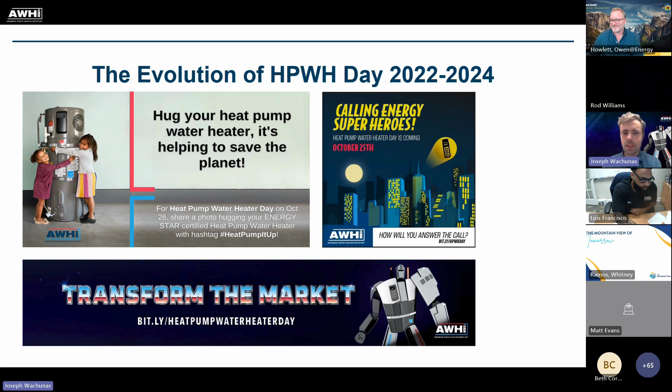Just a quick evolution, this was our third year doing Heat Pump Water Heater Day. First we were talking about hugging your heat pump water heater, then we talked about your superheroes, and this last year the theme was transforming the market. So thanks to all of you for posting and using this market transformers theme. We felt it was quite successful. Hopefully you saw the trading cards based on the different legs of market transformation: the policy, the product, programs, promotions, and payments that we had a good little fun with this technology in October.

We did our promotional toolkits, a lot of use, everything went pretty well. I can't get rid of my background, still have it up. I don't know if I'm ever going to take it down.

Just wanted to celebrate our Excellence in Water Heating Awards winners again. We had Albert Brooks for the Commercial Heat Pump Water Heater Award. We had a tie for the Residential Heat Pump Water Heater Market Transformer, the Tech Program, and Cooper Marcus from Quit Carbon. Of course our star Heat Pump Water Heater installers on the call, Steve Broughton from Great Northwest. But Luis, it's a good thing you can enter the running next year. So glad to have you connected.

Clayton Homes won our new construction excellence award. Our equity program award was the Energy Coalition, and of course Geoff Wickes won the Lifetime Achievement Award. So congrats to all those winners, it was really fun to celebrate with folks.

And of course all of our sessions are online on our YouTube page, I will get a link in the chat for those. So if you missed any, I know I was heavily involved in making up this content, but it was killer content.

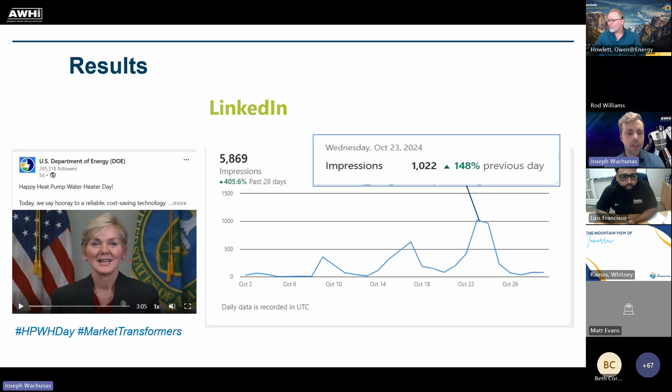We had amazing speakers, and of course had the Secretary of Energy with the keynote. So we saw some great numbers, had close to 900 registrants, close to 600 participants, good growth all around, and our website views just really spiked. So hopefully moving the needle with our impressions and participation, and the goal is to really shine a spotlight on the technology.

And just thanks to all the organizations that posted. There were over 150 organizations posting some incredible artwork there. We just did a little collage. So thank you all for posting and being part of this, and really amplifying the message of efficient water heating.

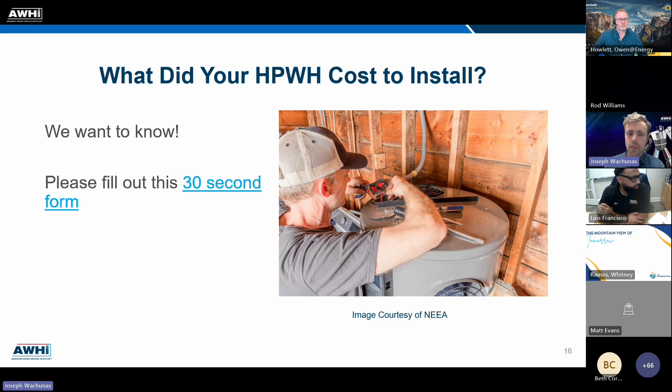So the last couple announcements: we are doing a little crowdsourced heat pump water heater installation cost survey, and we've done an article, a blog post you may have seen. You can click on this link, it's live, a 30-second form, just interested in what you paid to have your heat pump water heater installed. We're just curious how it varies across the nation, and we'll want to track this over time. So please let us know what your heat pump water heater installation cost.

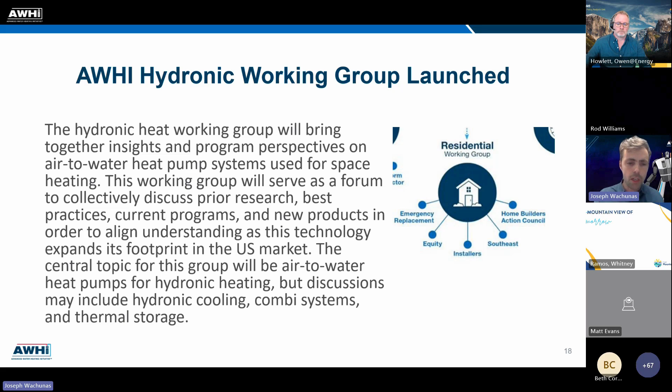No problem, Joe. Continuing on the theme of webinars, Energy Star just completed a two-part series to promote their newly released market acceleration guide. You've heard me talk about this before - it's an interactive, dynamic document out on the Energy Star website, broken up into modular sections, so there's a little bit of something there for everyone. It started out addressing the audiences of utilities and their program implementers, but it's expanded into so much more, and it's dynamic, so we will continue to update it with information.

We had in each webinar somewhere between 100 and 200 attendees join us, so not quite the 600 plus that Heat Pump Water Heater Day received, but certainly still great audience numbers. The first session was on program design and delivery, and we had Mass Save and Efficiency Maine join us for that one. The second one was more about engaging the supply chain, enhancing relationships, building demand, so we had New York State, the utilities represented there, as well as General Pacific and the team there, Crystal, who was terrific, and we had some great interaction with the audience.

Recordings will be available very soon, so we'll get those posted and sent out, Joe, so everybody can listen. We anticipate we'll be doing more of these because it just seems like the format is very engaging. It's easy, for the most part - there's always the devil in the details with logistics to get them set up, as we all know, but it really worked out well.

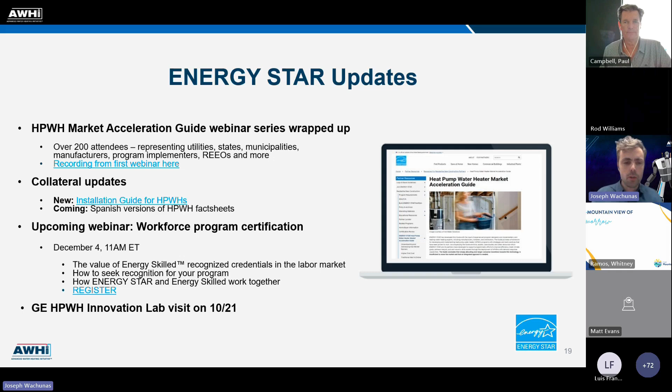Awesome. Well, stay on with me, Paul. Let's dive into our first part of today's program. We're going to talk to two heat pump water heater trailblazers who are going to share their thoughts and advice and feedback to the large industry represented here before they ride off into the sunset to some great adventures.

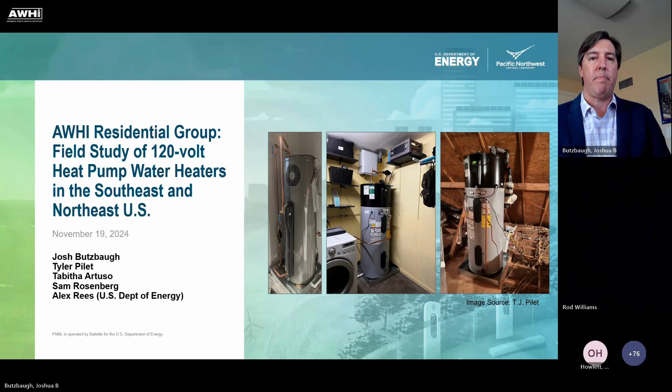Today I'm going to discuss the field study of 120-volt heat pump water heaters in the Southeast, and now we are expanding into the Northeast. Want to tip the hat also to my teammates, Tyler Pilet, Tabitha Artuso, Sam Rosenberg, and Alex Rees of the U.S. Department of Energy. I'll quickly go through some background and then the study setup, installation retrofits, which I think everyone will be interested in, analysis, initial conclusions, and then next steps for the study.

All right, the US has 65 million homes that currently use fossil fuel water heaters. They will need to convert to electric water heaters as we decarbonize. And that means switching to heat pump water heaters in particular. And for 240-volt heat pump water heaters, you have the issue of limited panel capacity and wiring. And that just means that you need two trades sometimes at the home to conduct the installation, and that increases cost and time.

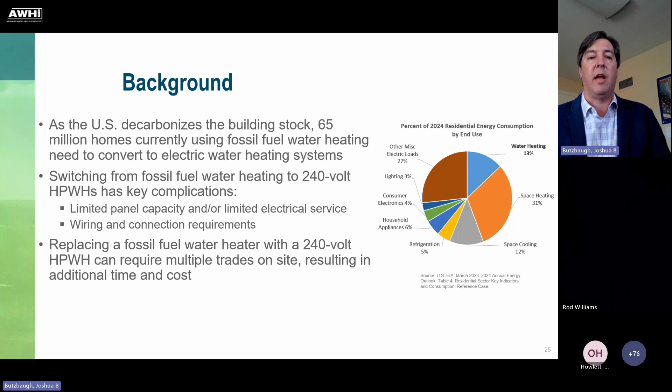The California Retrofit Ready 120-volt heat pump water heater spec introduced this 120-volt heat pump water heater that goes on a 15-amp circuit, takes up about 7.5 amps of that 15-amp circuit, and shared among other end uses. The nice part about this product is that it offers quicker and cheaper installation when electrifying homes, going from gas or fossil fuel water heaters to heat pump water heaters.

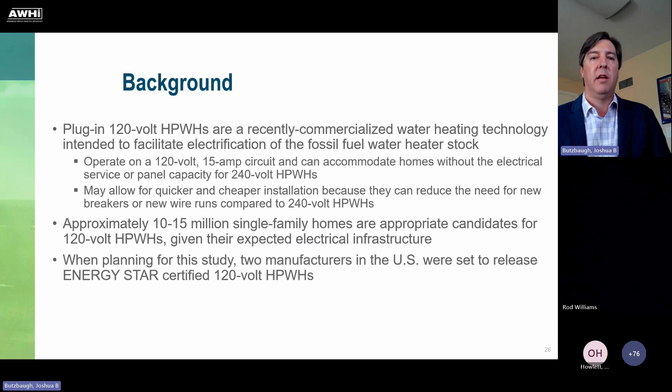There are roughly 10 to 15 million single-family homes that are good candidates for this technology. This is given their expected electrical infrastructure. And when we were initially planning for this study, there were two manufacturers that were releasing 120-volt heat pump water heaters.

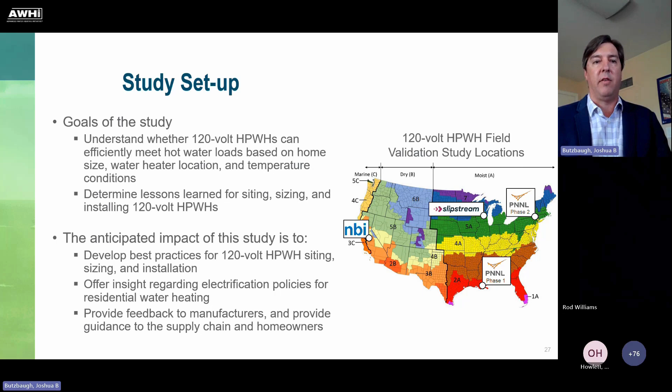The goals of this study are to understand whether 120-volt heat pump water heaters can meet hot water loads based on the home size, water heater location, temperature conditions, and then determine lessons learned for siting, sizing, and using those lessons learned to develop best practices, offer electrification policy insight, and then provide feedback back to the manufacturers and supply chain.

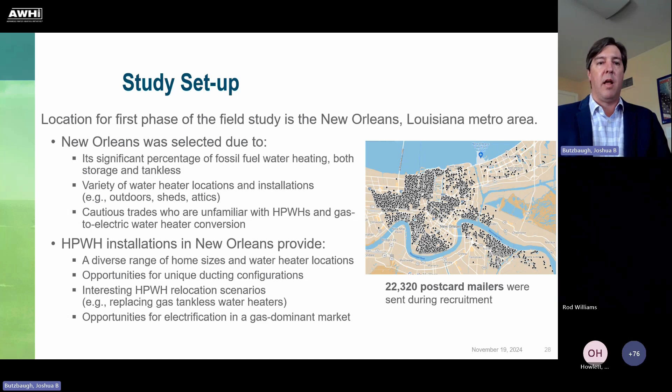For the first phase, New Orleans was selected as the location. New Orleans has a lot of different types of homes that offer interesting retrofit scenarios for 120-volt heat pump water heaters. A lot of unique ducting configurations and relocation scenarios. So it's a neat place to work if you're replacing gas water heaters with heat pump water heaters. On the right side, you see all the postcards we sent out, and we've got roughly 20 homes right now that are installed after sending out about 20,000 postcards initially. So this is like a blanket recruitment approach, so to speak.

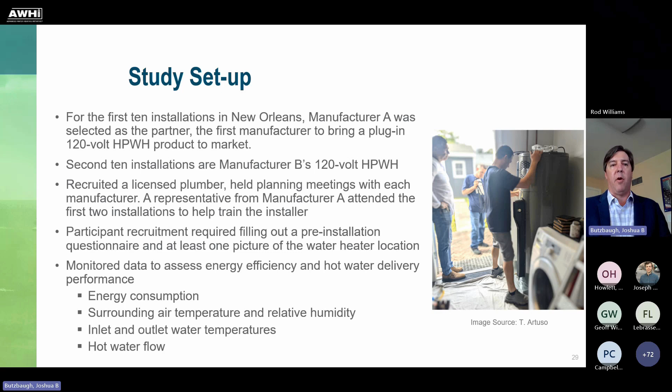For the first 10 installs, manufacturer A was selected. They were the first manufacturer to release a 120 volt heat pump water heater to market. This product is recommended in climate zones 1, 2, and 3, so that was another reason that we selected New Orleans. And then the next 10 installs were manufacturer B's 120 volt heat pump water heater, which has 900 watts of backup electric resistance. And that product is recommended throughout the entire United States.

We recruited a licensed plumber. We had to call maybe 40 or 50 plumbers in the New Orleans area. Found one that installed heat pump water heaters before, but they had so much HVAC work, they didn't want to work with us. We eventually found a smaller installer, a 2-person operation, and they were very interested to learn. We met with the manufacturer and made sure for both B and A that we sized appropriately, and manufacturer A also provided one of their staff people to conduct the first 2 installations to help train the installer.

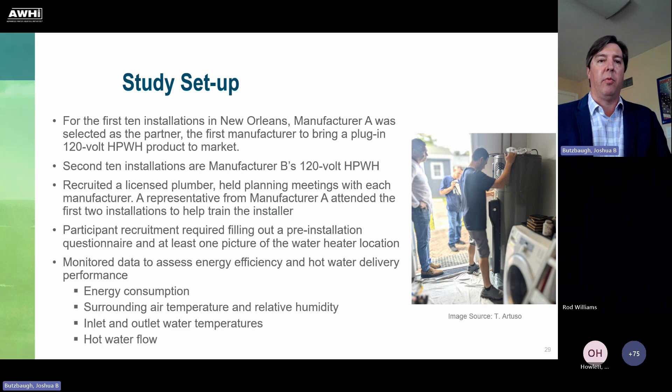Recruitment, we had a pre-installation questionnaire sent and a picture of the water heater location. This was very helpful. I recommend installers ask certain questions to try to understand the siting characteristics of the home and get a picture. Really helps with conducting the install. And we measured energy consumption, air temperature, inlet and outlet water temperatures. We've conducted some analysis with all of that data, which I'll get to in a little bit.

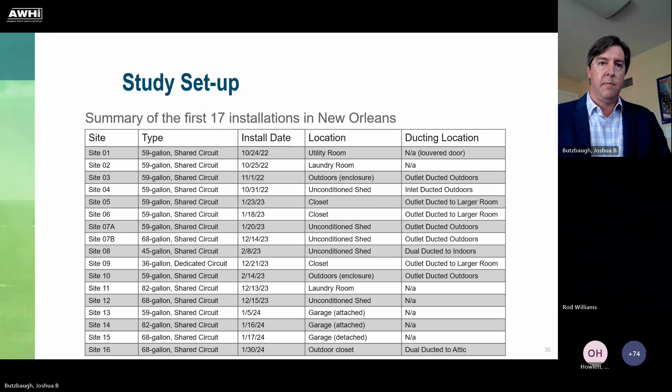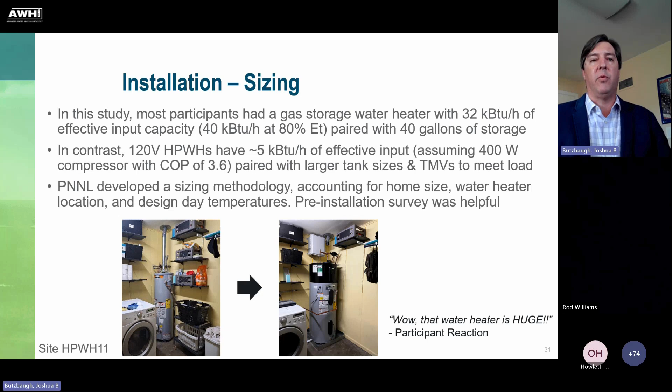So that 40-gallon gas storage water heater has a first hour rating that's comparable to a 65-gallon 120-volt heat pump water heater. And so you're going from a 60-inch tall, 20-inch diameter product to 72 inches tall and 26 inches in diameter. Plus, some of these heat pump water heaters have their air filter located on the top, so you need another 4 to 6 inches of clearance on the top. It just means that getting to the water heater location can be a challenge. We had one basement in New Orleans with a spiral style wooden staircase, and we're not going to be able to get a big heat pump water heater down that staircase if you didn't remove it. So those are the kinds of challenges that heat pump water heaters can present.

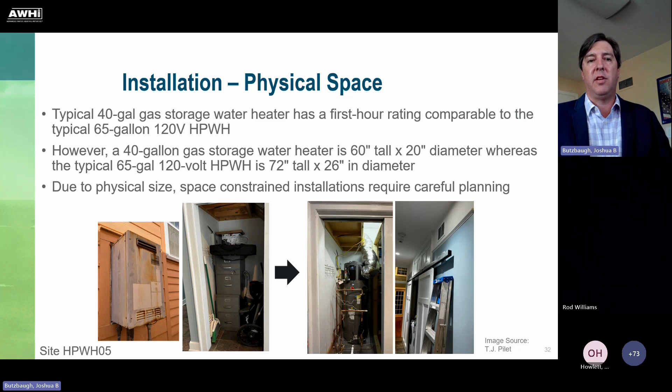And in these pictures, you'll see that there's a gas tankless water heater located outside the home. In the far left picture, this picture was taken with my colleague Tyler with his back against the wall of the neighboring home. So there's only a few feet in between these two homes. So we had to relocate to a closet. You can see that closet with the file cabinet in there. Pulled those files out, put the heat pump water heater in, ducted it, and ran the condensate through the wall. There's a washer and dryer on the other side of that wall, and then vented it up above the wall on the other side. So those are the kinds of challenges that you have with space constraints where the existing water heater may be located. If you have to relocate, it can add additional cost to the installation, but it is much less than upgrading a panel, for instance.

Another challenge were the unconditioned locations. Even in climate zone 2 in New Orleans, we've had at least two multi-day periods in which temperatures remained below the compressor cutoff temperature of 37 degrees. That would have been December of 2022 and January of 2024.

First time, in the middle picture, you can't really see it very well, but in the upper right corner, we put in a 200-watt heat lamp that kept that space warm enough to get through those 3 days and provide hot water. However, in January 2024, we tried the same tactic and it did not work. The home ended up using more hot water than the heat pump water heater could provide, and the homeowners were unhappy and wanted their gas water heater back.

So you can kind of see the transition from the old gas water heater, the heat pump water heater, back to a gas water heater because the homeowners no longer wanted that heat pump water heater. And that just means that for outdoor water heater locations, like these enclosures, which are popular in the Sun Belt, detached sheds, detached garages, unconditioned attics, they have a higher risk of compressor cutout. And I should mention quickly that in attic installations, we've seen air temperatures go above 120, which has also caused compressor lockout.

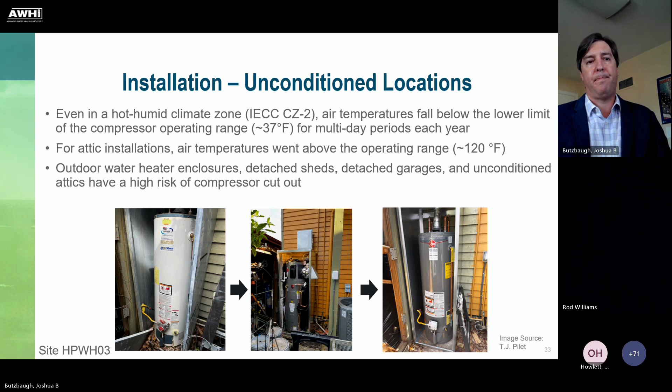The good news from this study is all of our installations were completed without changes to the home's electrical infrastructure. Did not run new wiring or outlets, did not replace or add circuits. However, we needed to conduct electrical assessments, and those took about 30 to 60 minutes. We used the circuit tracing tool, find out which circuit the outlet belongs to, and then flip off that circuit and use a meter to figure out what other end uses share that circuit. You want to make sure that there's no real large loads that share that circuit, or else it's not a great candidate for a 120-volt heat pump water heater.

Roughly a quarter of the homes we visited through site visits either did not have a receptacle nearby, even though their survey may have said they did, had a non-functional receptacle nearby the homeowner hadn't checked, they had a functional receptacle but the circuit didn't have enough amperage for the 120-volt heat pump water heater, or they had outdated wiring, like knob and tube, cloth wiring that we didn't feel comfortable putting a 120-volt heat pump water heater on. So that's one of the considerations, whether a home fits one of these four kind of profiles and whether or not a 120 volt can go into that water heater location or needs to be relocated.

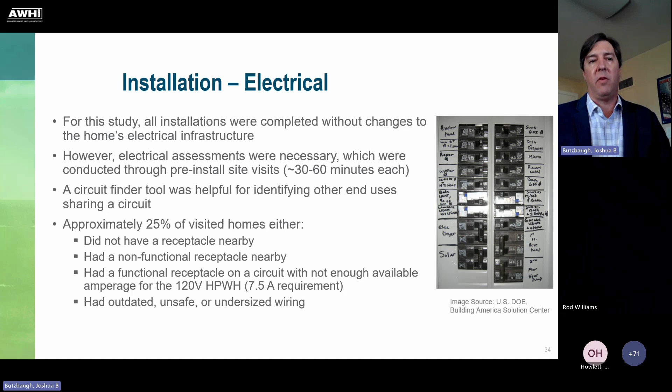As we conducted this study and did installations, we found that we needed more and more special order materials. Those water heater enclosures are made to order. They're large. The heat pump water heater doesn't fit into that old enclosure that had the gas water heater in it. We found out that flex duct and duct terminations weren't readily available at hardware stores often. We had to order duct kits, which hopefully going forward will be solved with a lot of manufacturers adding flanges again onto the heat pump water heater, so you don't need the kit.

But we also needed grills with plenty of net-free area, custom-sized louvered doors. Didn't realize this, that there are louvered doors that may not fit a number of door sizes. And then we even needed replacement thermistors in a couple of cases where thermistors failed. We had to swap them out. And that's part of the challenge of 120 volt heat pump water heaters, because you either don't have backup or don't have a lot of backup heating. If there is something that needs to be fixed or replaced, it needs to happen quickly. So having replacement thermistors is helpful.

Why does this matter? Well, if you're conducting emergency replacements, roughly in that 24 to 48-hour period, you need to have these materials available in stock for installers. And just in general, something to keep in mind is these installations require roughly 4 to 8 hours of labor. And this does not include the site visits, electrical assessments, and any return trips that we had to take.

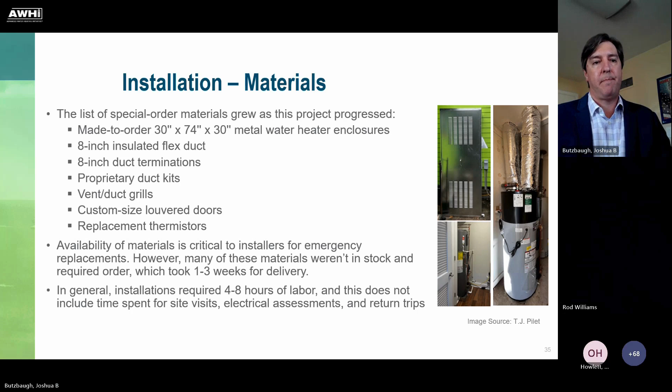Here's the hot water consumption analysis. It's not that exciting just because it fits. If you do research with hot water, it fits the profile that you kind of see normally. For two-person occupant homes, 39 gallons is very close to the low gallon per day draw profile in the DOE test procedure for the UEF test.

56 and 54 gallons are roughly in that medium use profile for the DOE test procedure. So this is to say hot water consumption was around what we would expect on average.

And then we had our high consuming days, which are the top of those whiskers, where you have roughly the 97th or 99th percentile days, which may be our peak sizing days, where you have over 100 gallons per day, and even greater than these numbers here, where the heat pump water heater needs to keep up with that load throughout the day to prevent hot water runout.

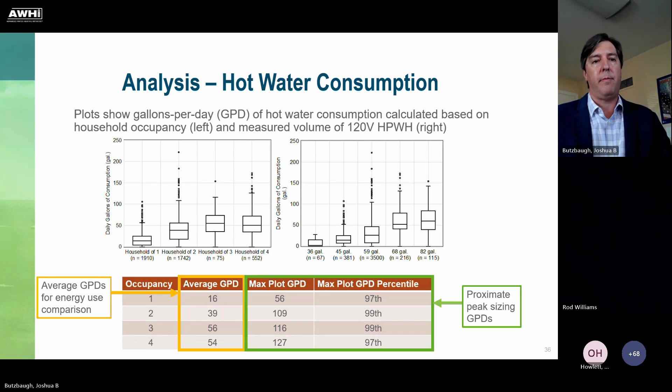Kind of a similar story with energy use. It was within what we would expect for a heat pump water heater. Obviously much, much lower than what an electric resistance water heater would do under these conditions. Average use was roughly 500 kilowatt hours for an average occupancy of 1.8 people. If you were to scale that to the US average home size of about 2.5 people, then you're looking at about 700 kilowatt hours a year.

Strong correlations between occupancy, hot water use, energy use. You'll notice that the one-person homes, such as Site 4, had a lot of days with less than 1 gallon of hot water consumption. With one-person homes, they just travel more. This particular person in Site 4, I think, was a professor who was on the road a lot doing research.

And then in New Orleans, what we found is the month of August of 2023 was so hot out that no one really used hot water in the study for that month. So you even have hot air temperatures causing reduction of hot water usage.

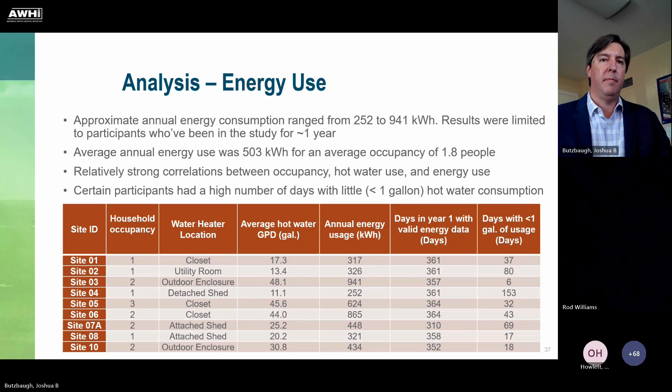For hot water delivery, out of 4,000 plus days, roughly 2% of days had hot water runouts. That's when the outlet temperature fell down to 95 degrees Fahrenheit. That's what we're calling a hot water runout.

And we're calling them days because what we'll see is someone will run out of hot water and then they're going to check again in a half hour or an hour, and they're going to expect that tank to be heated up again already. But in a lot of cases, it's not. And so we don't want to count multiple hot water runouts when it's really just one initial runout and people going back and checking their hot water again.

There were a select group of participants that had the most hot water runouts. We noticed that they had their 120-volt heat pump water heaters located in unconditioned spaces. And then of the ones located in conditioned spaces, one previously had a gas tankless water heater, so they're used to having that joy of endless hot water.

So they may not be used to having to think about how many fixtures they have going at any given time. In our pre-installation survey, 6 of the 7 participants reported never running out of hot water previously, which does not really surprise me just because of such high input capacity with gas water heating equipment.

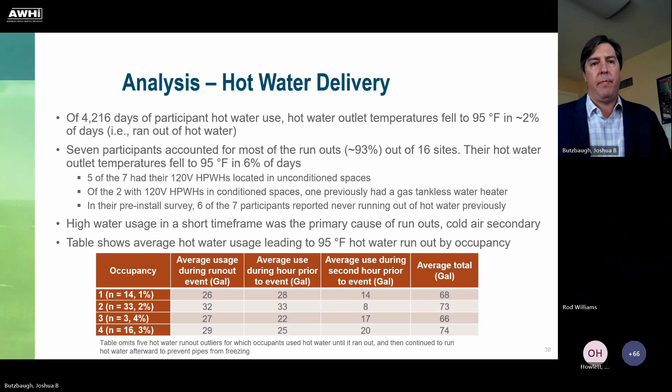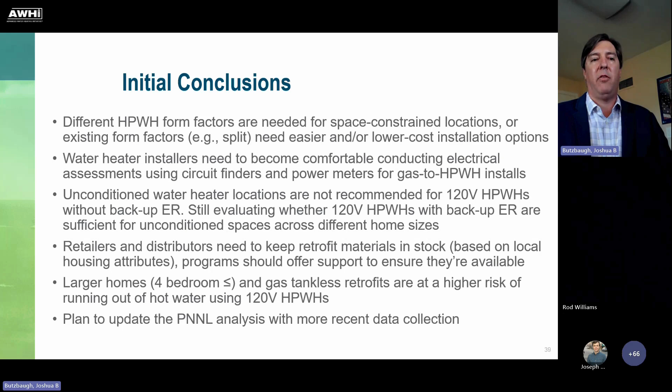And then just the larger homes and gas tankless retrofits, they have a higher risk of running out of hot water with a 120 volt product. The good news is, at least for larger homes, they generally have 200 amp panels or larger, so usually they can handle 240 volt.

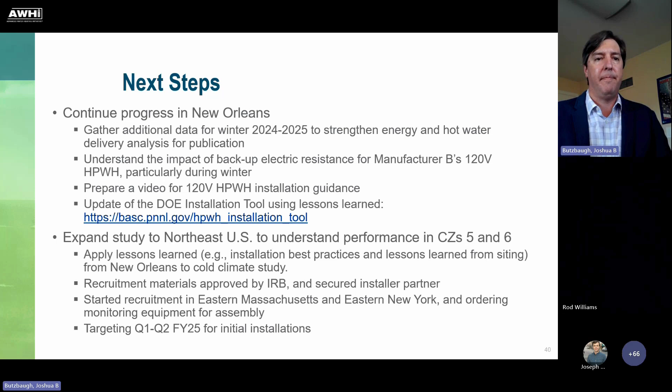That's great. Thank you, Josh. Does anybody have a burning question? I have one or two I want to ask, but anybody want to step in?

Sure, I can jump in for one. Thanks for this great presentation, Josh. Did you look at COP? Just kind of how they performed, and the other one was mixing valve set point or thermostat set point and mixing valve set points. Any information on that would be great.

Sure. So what we did is the default set point on the tanks is where we left them, and I believe they're all around 140, and that's where we've left them. It does reduce some of the COPs, and we do have some COP data. We haven't published that. I think there's a question as to how people would like to see it, whether certain temperature bands or certain seasonal bands. So we've thought about how we want to break this out that's most useful to programs. If people want to see COP data, happy to share it. Just let us know what you think is the right way to cut the data, so you get the most helpful information out of it.

Owen, I know you have a question, so please feel free. Yeah, I just wanted to ask one thing. So you said some of the heaters were not able to keep up in the cold, and some of them had resistance backup. I know that because they're 120 volt, they have small resistance backup elements. Was it only the water heaters without the resistance backup that failed in the cold and caused complaints? Were the ones that did have resistance backup conspicuously better, or was it a mix?